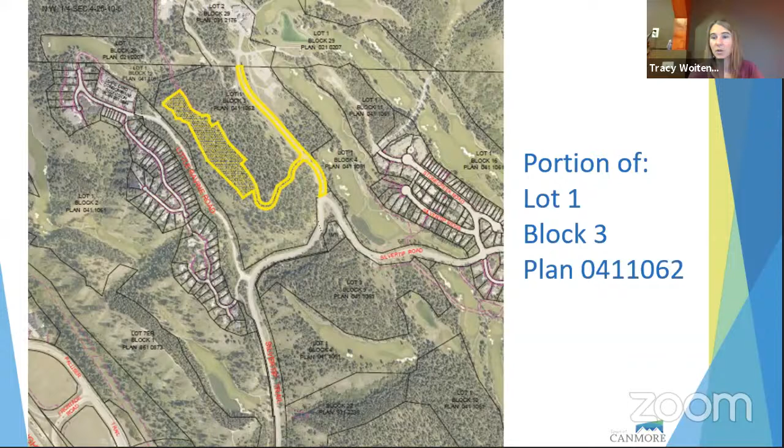This is the land we're talking about. It is a portion of Lot 1, Block 3. It is a bit of a funny shape here, shown in the key plan in yellow. That's the area, and I'll describe how that area got to be the subdivision area in a moment. The application is for 17 resort accommodation lots and 1 resort amenity lot. I'm going to use a pointer here for everybody.

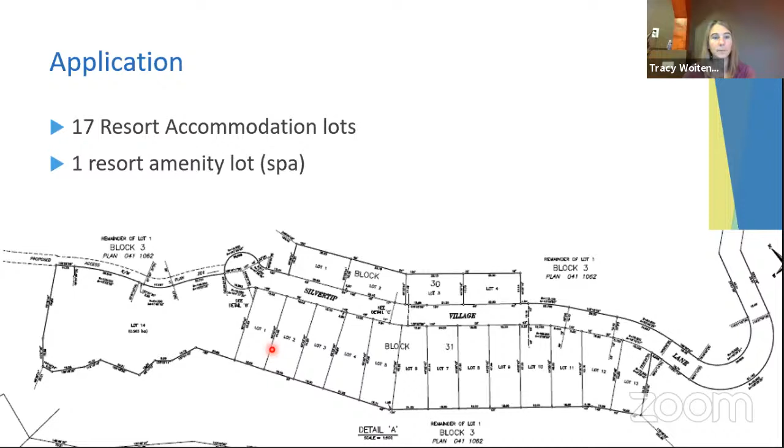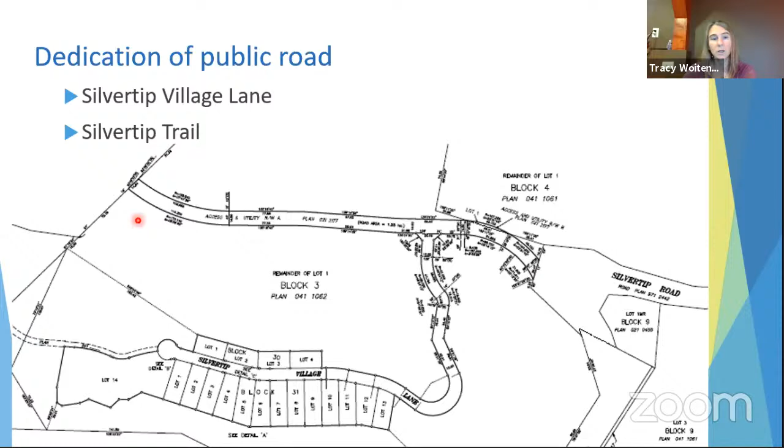So this is lot 14, the spa lot. The remainder of these smaller lots are the 17 resort accommodation lots. There's also some dedication of public road. This new road here is Silvertip Village Lane, proposed to be dedicated as a roadway. There's also a portion of Silvertip Trail, here, which is the existing road up to the clubhouse. It is currently not a public road; it has a utility and access right-of-way on it. The town has access to our water up here, our reservoir, and for public access as well. So they would like this road to become public instead of private.

So the area of Block 3 that they're proposing to subdivide is on a bit of a bench here. This is the bench, but there's quite steep slopes below the bench and above the bench. Sorry, there's a gully here that runs down that way.

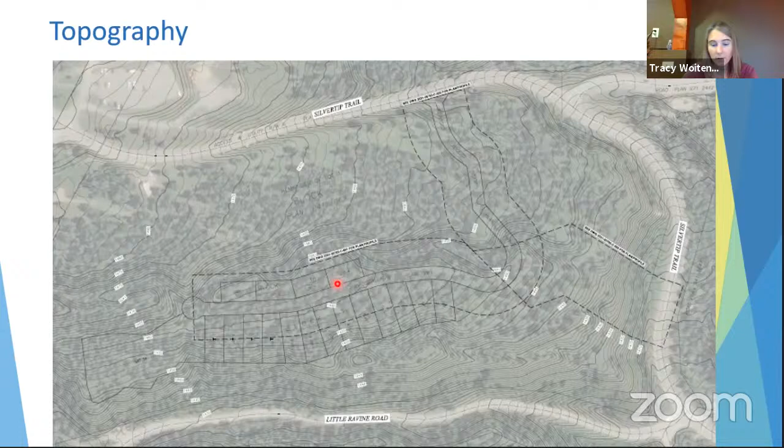Ms. Woitenko, do you mind if we interrupt with questions, or would you rather we just hold them? I don't mind interruptions with questions as long as it's related specifically to this part of the presentation. I may cover things later which would answer a question, but I don't mind answering now. I don't want to interrupt your flow, but probably we'll move on from this. I'm just curious if there's anywhere else in Canmore we would be familiar with that has similar cuts as being suggested here.

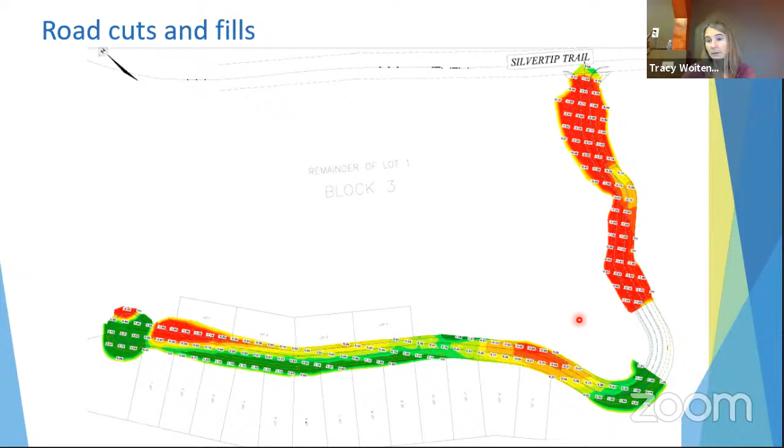Yeah, so for example, the latest phase 3 of Stewart Creek had quite extensive grading done to it. Similar to that? Yeah. Thank you. Although slightly different, Stewart Creek phase 3 they did grade the lots as well; this will have less grading of the lots. So it may be more comparable to, for example, Mountains Reach in Silvertip, where the road was graded, but the lots are quite steep.

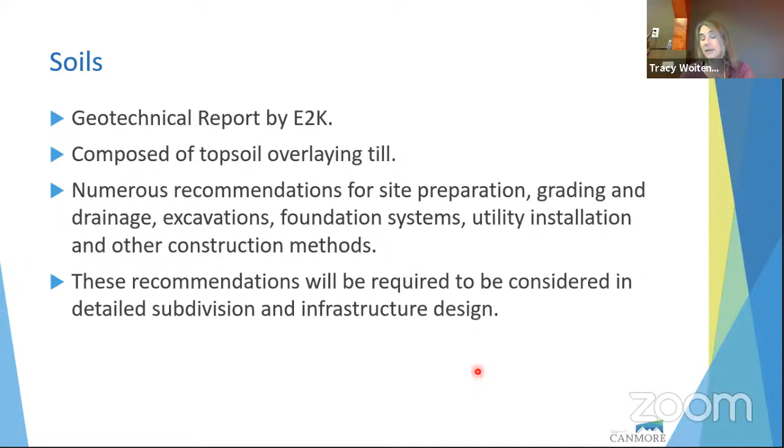Sometimes resulting in grading of lots that are 33%, which is quite steep. So the soils, we did get a soil report, which was provided for you. There are numerous recommendations in the geotechnical report for how to deal with the types of soils and steep grades here, so we would require these methods be used at construction management plan for utility installation, and at detailed subdivision and infrastructure design.

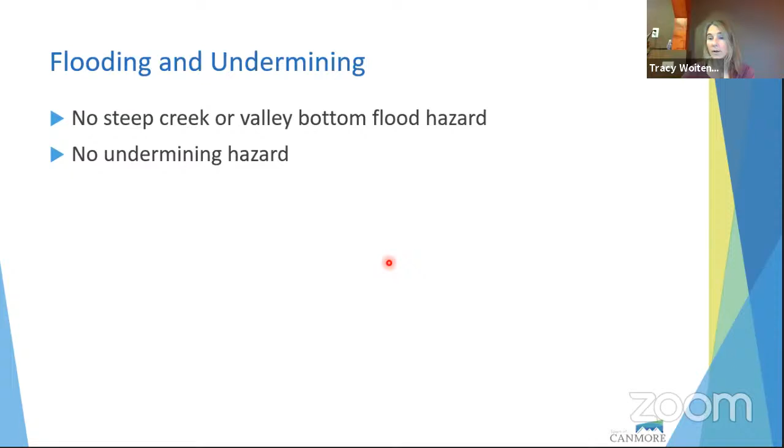For flooding and undermining, there is no steep creek hazard or valley bottom flood hazard here, and no undermining hazard either. The one concern identified in the geotechnical report is erosion and slope failure. The slope stability analysis recommends either development setbacks, moving lot lines, or registering a restrictive covenant on the title to ensure buildings don't go into that development setback and the land is maintained. For example, a restrictive covenant would require maintaining the vegetation there.

You just froze again, Tracy. I just sent her a message to let her know. Yeah, this won't work very well.

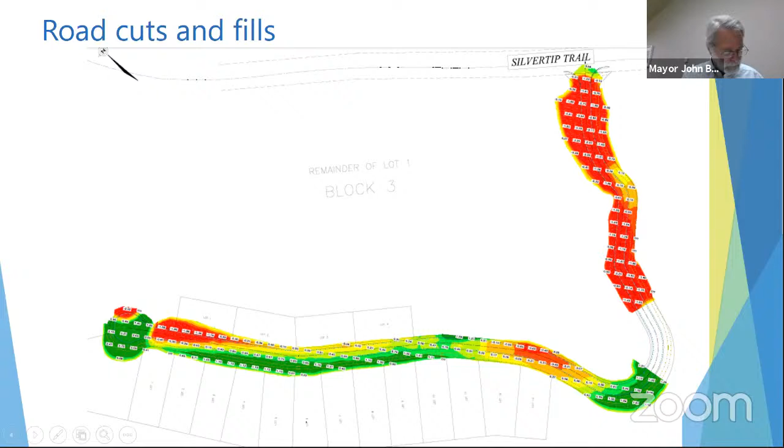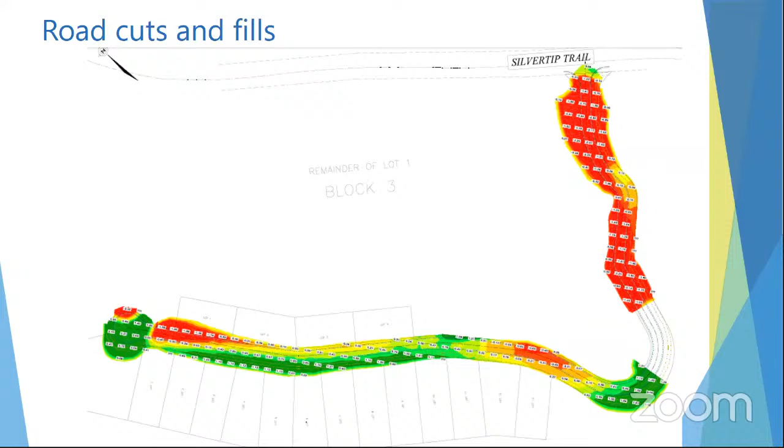Okay. So yeah, there'll be some... oh, and Jane, can you go to the previous slide just so I can see that was again? And forward. And forward, please.

Right here, I was at stormwater management. So they have considered stormwater management from a perspective of needing overland drainage and catchment areas.

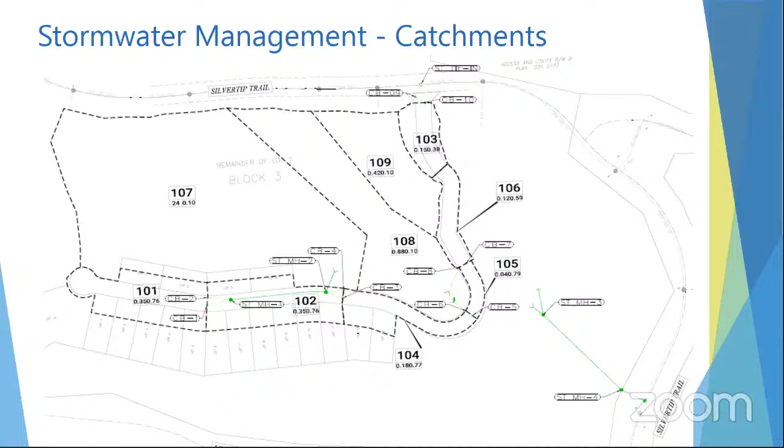This is the overland drainage. There will be some small ponds where those are is a gully feature, so there will be some overland drainage, either a bridge or a culvert required there. That's important to note later when I talk about a bridge or a culvert. That would be determined at detailed design.

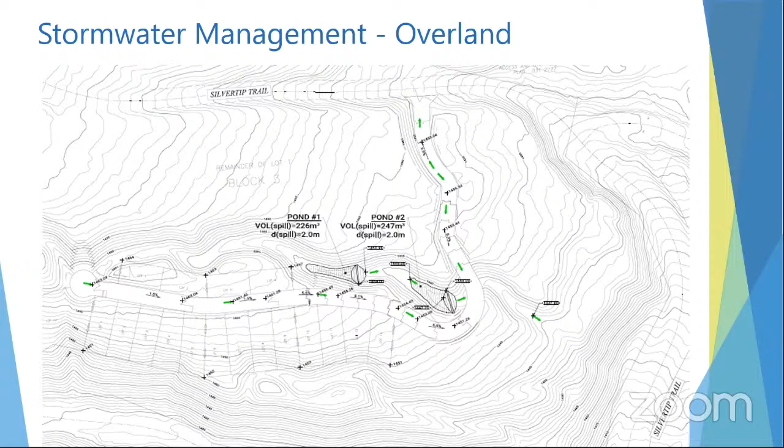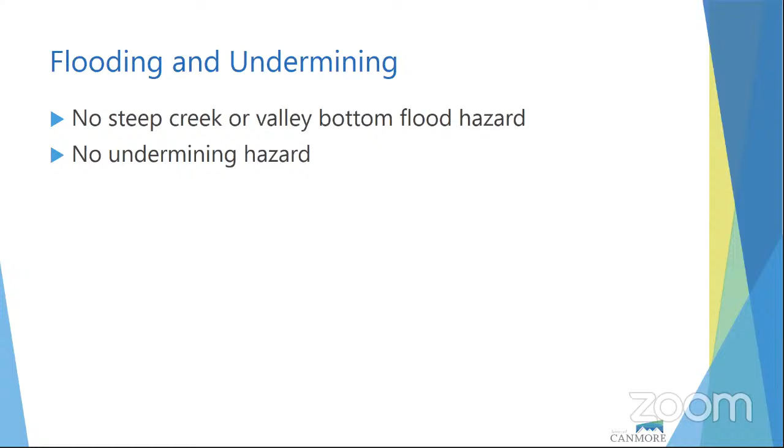There is no steep creek or valley bottom flood hazard, and there is no undermining hazard. But there is the hazard of erosion and steep slopes.

The geotechnical report recommends development setbacks from the steep slopes and erosion control. This will be maintained through a restrictive covenant that must be registered on the title of the lots that have the steep slope concerns.

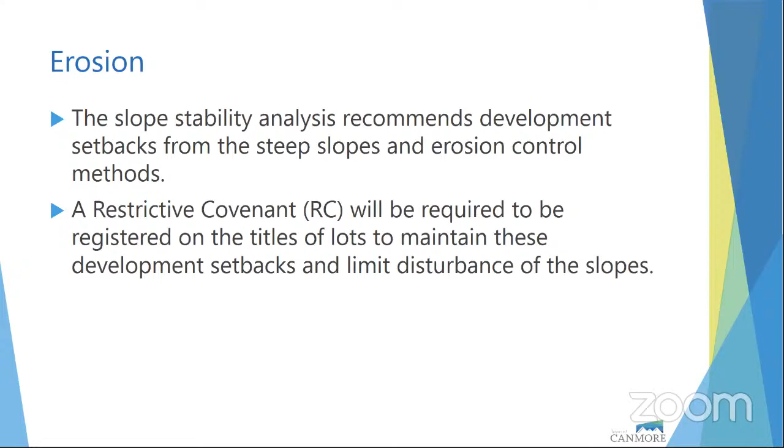This is the map taken from the geotechnical report showing what lots may need a restrictive covenant on them. At detailed design, if the reports show a different setback, at final before endorsement, we would need to register the covenant as per the most updated report.

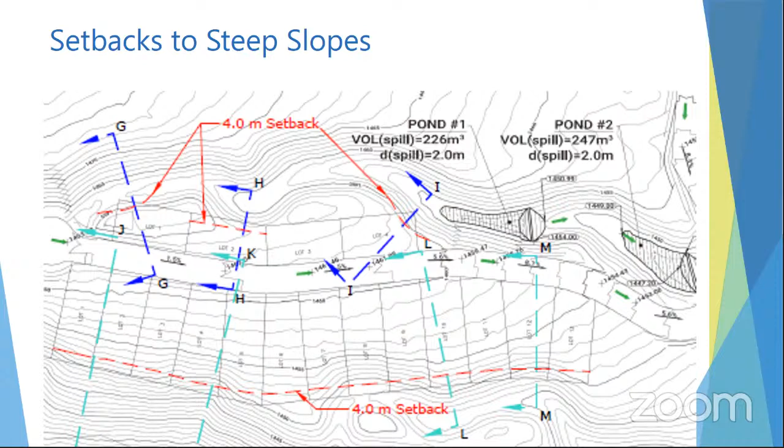We need to determine if there's adequate accessibility to a road. As I mentioned before, there's two roads that need to be created or dedicated.

The first is the acceptance of the private road to public road, that portion of Silvertip Trail which runs from Silvertip Road up to the golf course clubhouse, and construction of the new public road, proposed to be named Silvertip Village Lane.

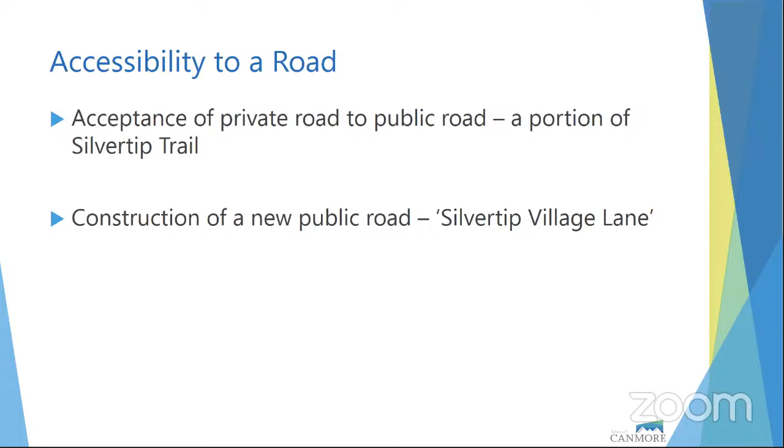The Silvertip Trail portion is at the top, and the Silvertip Village Lane is the north-south road that comes off and into the subdivision itself.

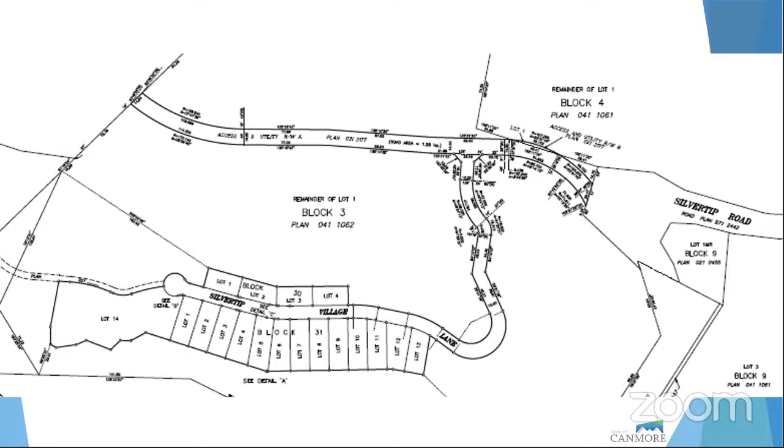As a condition of subdivision, the town would require Silvertip Trail to be at the current EDCG standards. Any upgrades required to this road have to be undertaken by the developer prior to acceptance or endorsement of the plan of subdivision or of the road plan.

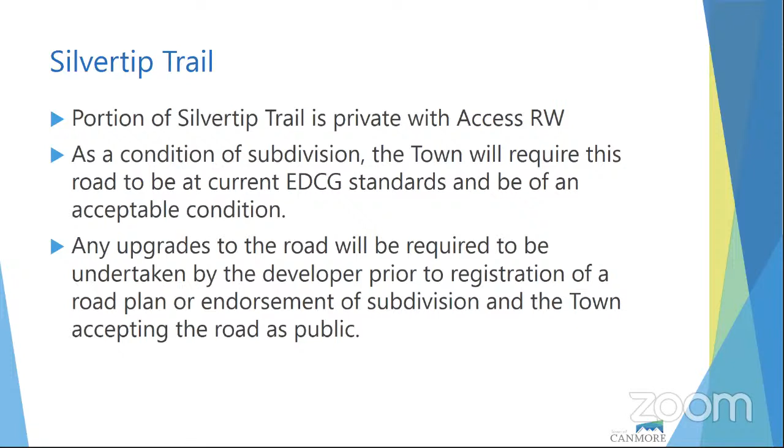Silvertip Village Lane, what's being proposed and shown here on the slide by the applicant, does not meet our current EDCG standard for a local road. So we have put forward a number of different things. What doesn't meet here is they've only shown us a sidewalk on one side, which is asphalt.

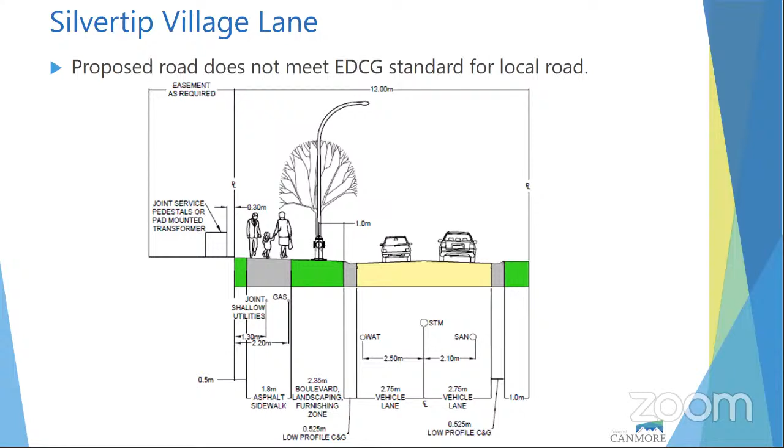Typically we have sidewalks on both sides and they are concrete. The shallow utilities would not be underneath the sidewalk, and a couple other minor differences.

Our recommendation for road design instead is what's called the collector standard to the bridge or the culvert, where I was saying at that big elbow in the road. We would ask that they construct an interim design until the final road is known. There will be connections, driveways, and other roads that come off that upper part, and we don't want the road finalized before we know the full impact of other traffic going onto that road.

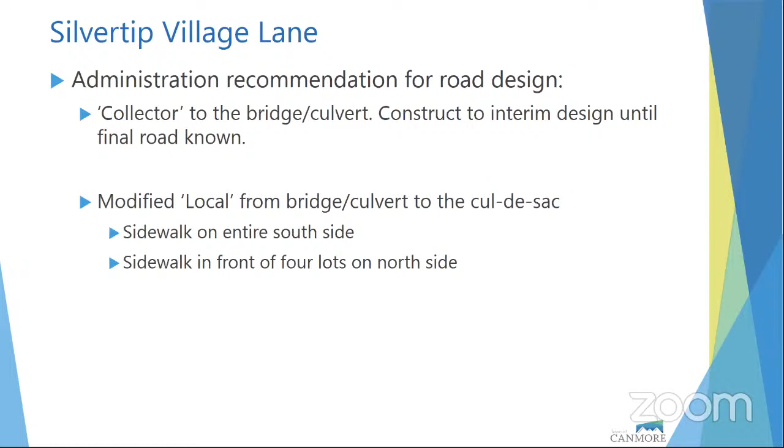So it would be an interim design. Then from the bridge culvert to the end of the cul-de-sac, we are requesting a sidewalk on the entire south side, concrete, and a sidewalk in front of the 4 lots on the north side. This is what it would look like.

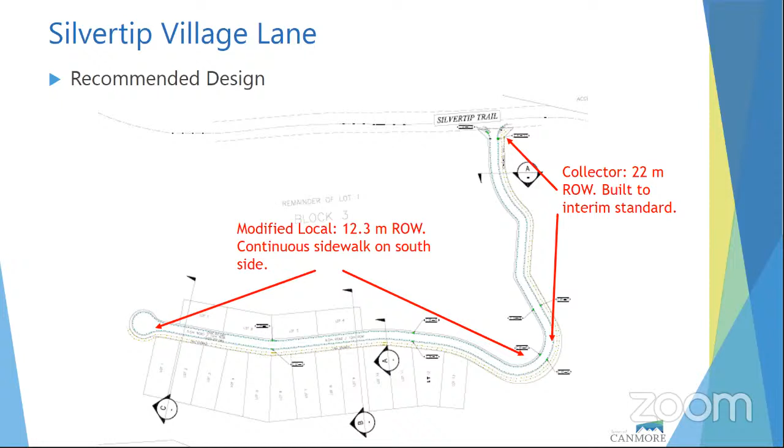The first section would be the collector, built to an interim standard, and the horizontal section would be the modified local, slightly different than what the applicant has applied for.

Emergency access isn't required at this time because of the density and the type of development. There's also a requirement that at future stages there will need to be water looping. So administration is proposing to the applicant that emergency access should not be constructed at this time, but at future subdivision phases when the water looping is constructed.

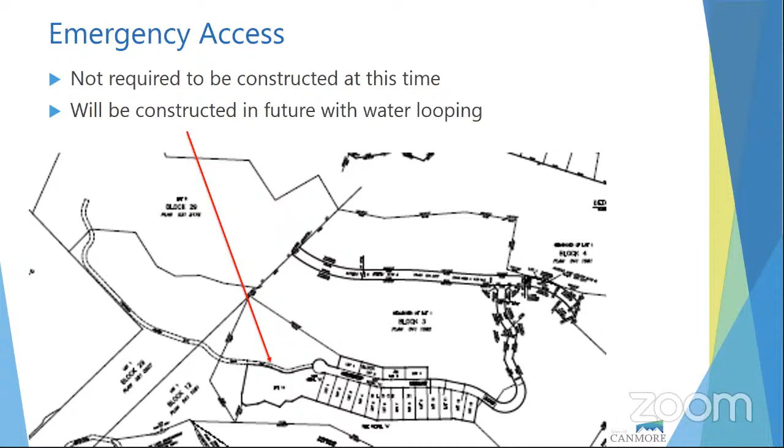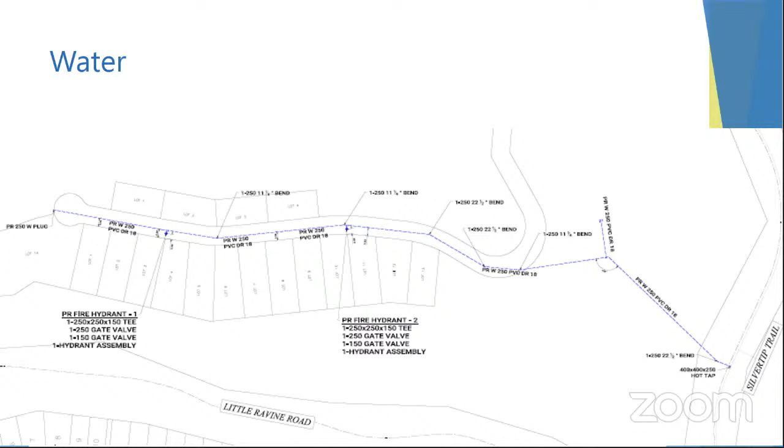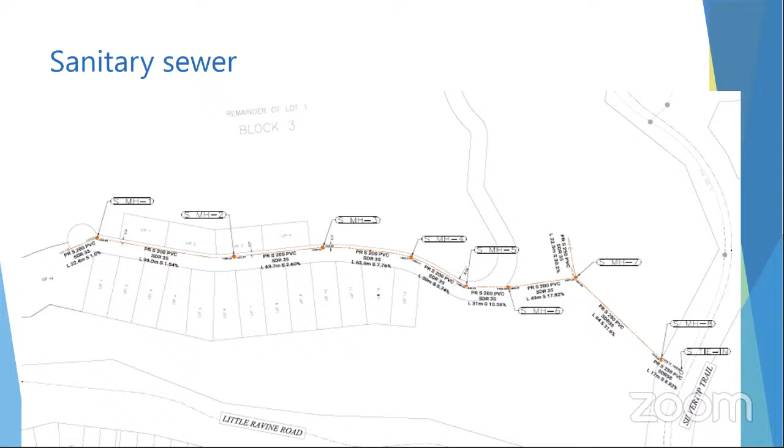We would determine what that alignment would be at detailed design, but there is adequate water and sanitary sewer. The sewer line follows the water line and would also need to be partly in a URW, and we would need to look at detailed design should this get approved.

And solid waste: we are not requiring solid waste bins as proposed by the applicant. That solid waste would be managed by the rental management company or the strata on site, similar to other hotels.

Other considerations we take into account at subdivision include whether this conforms with the MDP. It is consistent with the MDP for resort centre commercial policies.

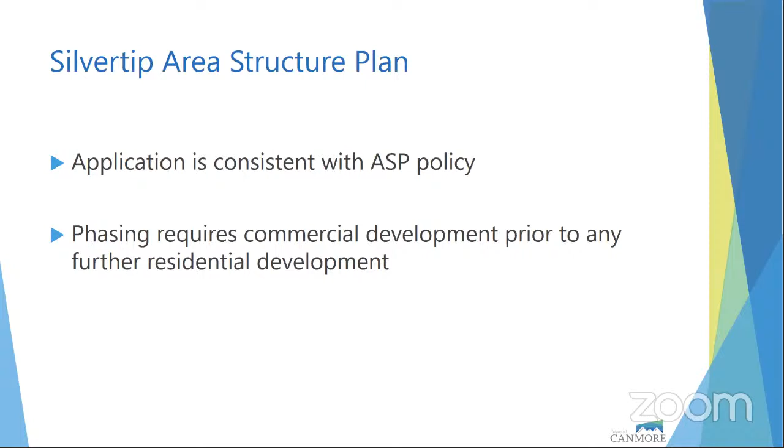It is consistent with the ASP policy of the Silvertip Area Structure Plan. In particular, phasing of the ASP requires any commercial development to occur prior to further residential development.

Resort accommodation and spa are both commercial uses in the Silvertip Village Core Direct Control District. However, administration does have a few concerns with the commercial use of resort accommodation.

Just to note that we do not have any resort accommodation developments yet in the Town of Canmore. They're either strictly hotels like visitor accommodation, residential, or residential with a tourist home designation. So this would be the first development of this type within the town.

So we are recommending the registration of a restrictive covenant to address two things: it would secure the commercial use required by the phasing of the area structure plan, and it would also secure the Town of Canmore in being able to obtain that commercial taxation piece.

The applicant is also proposing a strata subdivision to help address the commercial component, and that strata subdivision would come at later phases, once the building is built, because it's a volumetric type of subdivision when you do strata. So that would be quite far down the road.

The subdivision is consistent with the land use bylaw. In particular, this is the Silvertip Village Core Direct Control District, and these are uses that are listed in this district.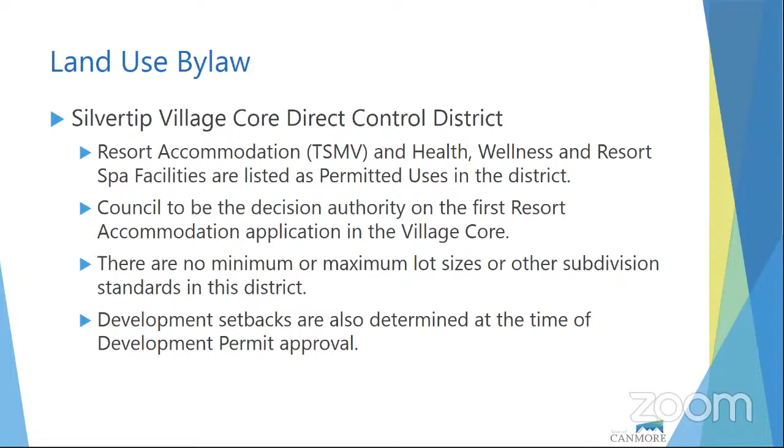For offsite levies, we would have them paid at development permit stage, at the time of development agreement, not at subdivision, because we don't know how many units of resort accommodation would be applied for. So that would be done at development permit.

For municipal reserve contribution, the MGA allows us to take up to 10% land for MR. The applicant is proposing to defer MR contributions to the remainder of Block 3, so that it would be accommodated within the future village core area.

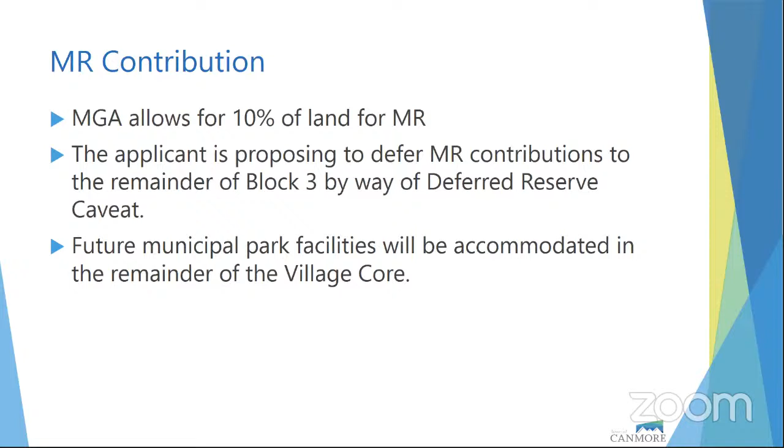With shallow utilities, these have not been shown to be designed to meet EDCG, and we would require them to be that way, or they would need to provide something else to our satisfaction at detailed design. At circulation, shallow utility providers said they would like to make sure that all of their utilities are in a URW plan and that it's registered at the time of endorsement.

Trails gets a little more complex, so I did have some illustrations to help show what the applicant is proposing and what administration is proposing. This is the applicant's proposal: the orange line is the addition of a trail from the existing trail over to this side, realigning some of the trail in blue, and adding a new sidewalk in the gray dotted line through Silvertip Village Lane. Administration feels that there are much better trail connections that we could get at this stage for this development.

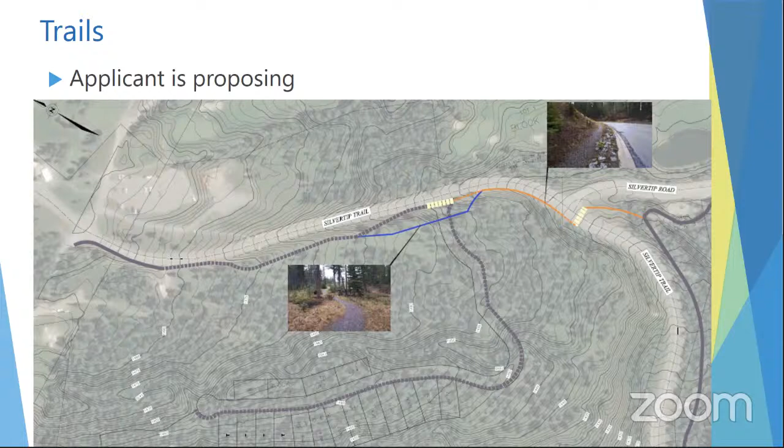We are proposing instead that, because the Town of Canmore is being asked to accept Silvertip Trail as a public road, shown in the black line, that would be asphalt pathway to our current EDCG standard, going up to the clubhouse. Also the addition of a new natural path, almost existing in its current location, which would just need to be brought up to EDCG standards, labeled there as natural path. We're also proposing at this subdivision that there is no sidewalk in the upper section, and there is the proper sidewalk on the southern section as suggested earlier.

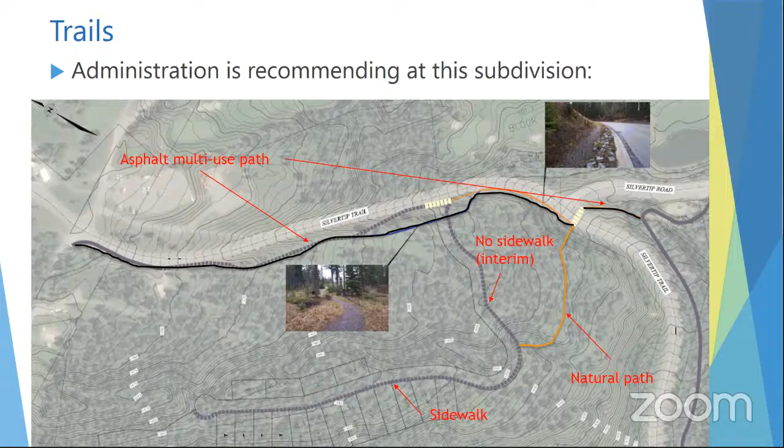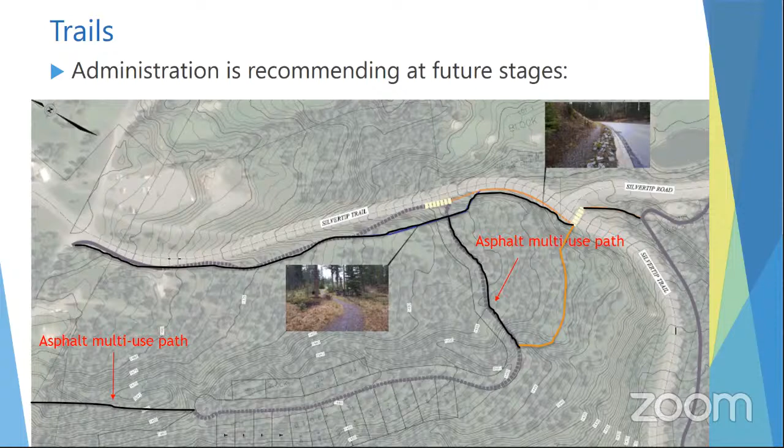At future stages of subdivision, where I've said there's no sidewalk, we would put in a new asphalt multi-use path. So two new asphalt paths, including on top of the water loop, which is the emergency access. This would be the final path layout at later stages.

The last thing to cover is wildfire. A wildfire risk assessment was prepared and submitted. As a condition of subdivision, we would be looking for completion of any FireSmart activities like vegetation management, and also structural mitigations at development permit and building permit stages.

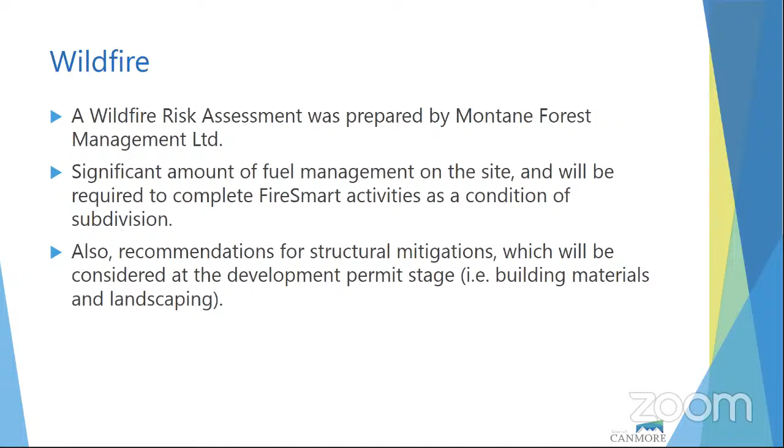This subdivision was referred in accordance with the MGA. We sent letters to all of the agencies required under the Act. There were no concerns or objections raised. We did get letters back from the utility companies noting registrations of URW plans and agreements.

We did receive many responses within the allotted time. We send letters asking them to please respond by a certain date. We got a lot of responses back, and they have all been provided for your consideration in attachment 4. Primarily, these concerns were regarding the commencement of commercial development.

There are some alternatives the subdivision authority could consider. One would be to refuse the subdivision, stating its reasons for refusal. The second alternative would be to approve the subdivision with conditions and/or reasons other than those listed in Schedule A, which is attachment 5.

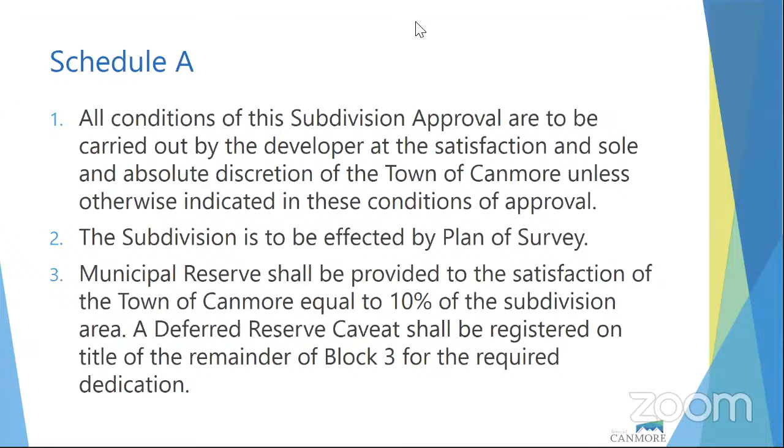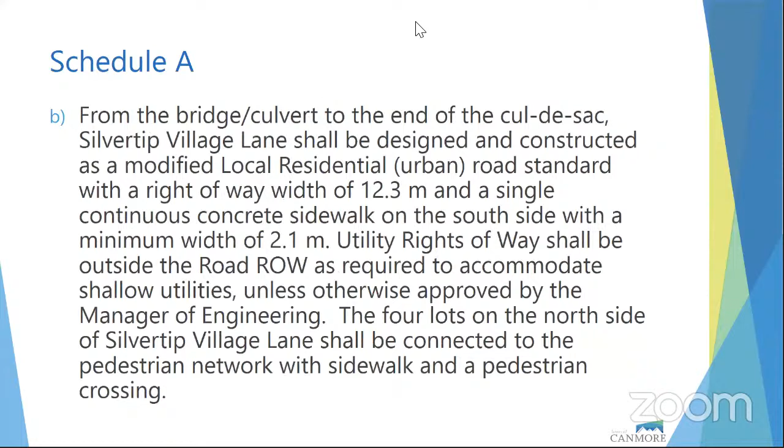To go back to my recommendation: the subdivision authority should approve this application subject to the conditions. I've put all of the conditions on the screen for you along with the reasons. I'm not going to go through each one, but should there be any questions on a particular Schedule A condition, we can use the slide for reference as we discuss it.

There should be 15 conditions. There's a lot of conditions in this subdivision. Oh sorry, there's 19. Just to point out, the last thing is advisory notes, that the commencement of commercial development on Block 3 must proceed prior to the commencement of residential development on Block 10. That's just advisory to the applicant for the Block 10 residential subdivision that is also in front of administration at this point in time. We're processing that application.

Any questions? Yeah, I have a few.

Don't know where to start, but let's start with fire, since you just talked about that a moment ago. It's noted that the emergency access wouldn't be built initially, but would come later on. Yet this area is noted in the wildfire risk assessment as being high and extreme. Can you talk about the decision to not require an emergency access to the northwest until a later date?

Yeah, sure. We generally follow the NFPA 1141 standards, as well as the City of Calgary emergency access standards. In both of those, they specify when either an emergency access or a second public access is required, and it usually requires above 200 residential units and/or a certain amount of commercial. This does not meet those requirements as of yet. So following those standards, the emergency access would not need to be provided until later stages of density in the village core.